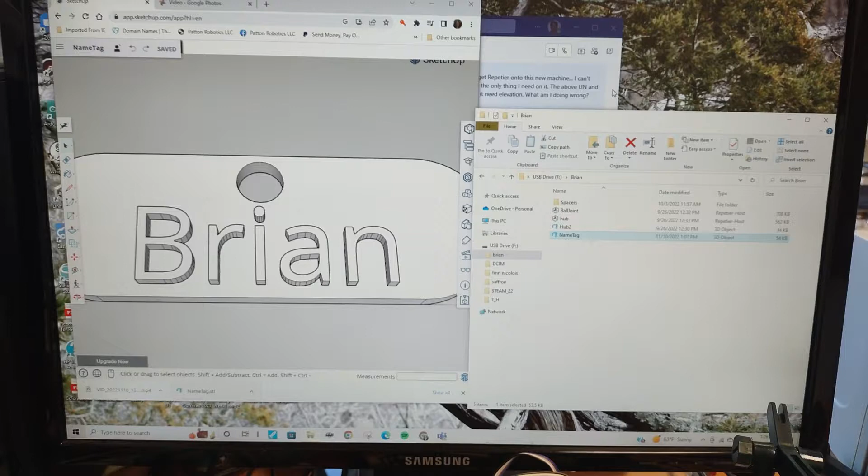Okay, so you've already got your tag, it's all been designed, and then you went ahead and you went down here and you downloaded it as an STL. Mine shows up right down here on a PC. Okay, you can see it's there. And I've dragged it onto my flash drive, which in this case is actually going to be a micro SD card in one of these adapters.

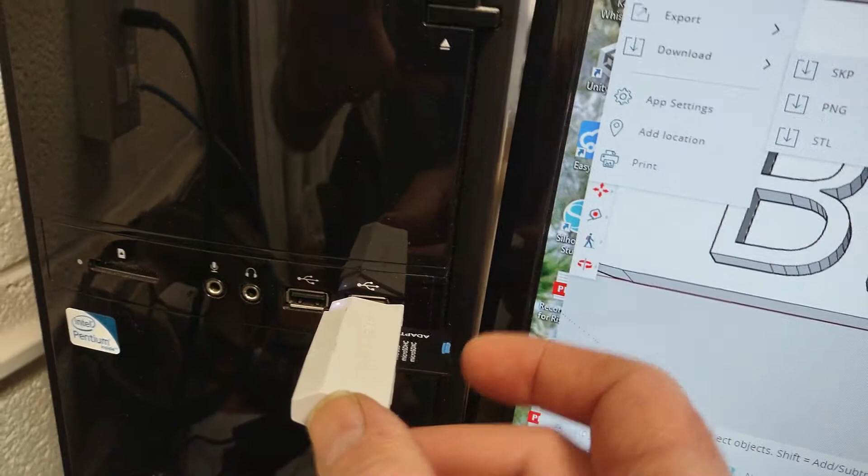So now I'm going to close this, and then I'm going to properly eject it. Okay. Hard to do with the camera here. We're going to eject it. Okay, so it's safe to remove. So now we're going to grab this and we're going to buzz over here to this computer. And you can see I've already played with it, so I've got a placard there.

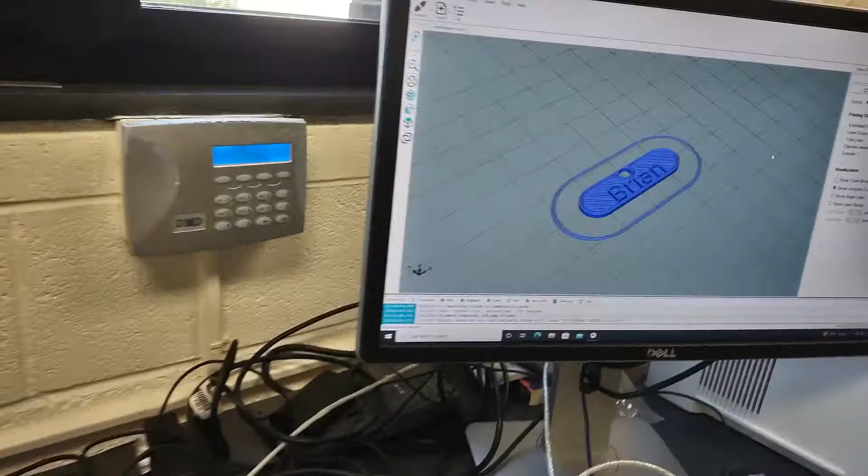But what I'm going to do now is I'm going to go to object placement and I'm going to trash it because I'm going to go through this process again. All right. And I'm going to go ahead and insert this into here. And now what I want to do is I want to come up here. Oops, we can close this. We don't need to deal with it this way. Go up here to load.

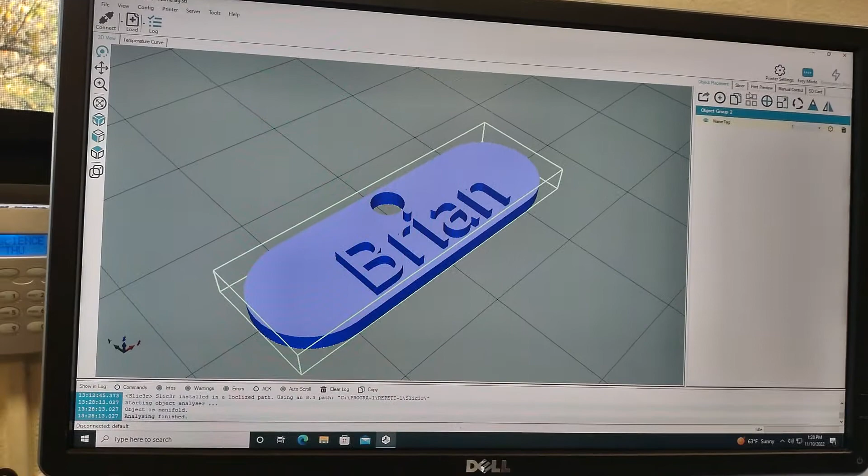And from there, we're going to go find where you put it. Oops. Let me find the drive. There we go. And mine's from Brian. And it's name tag, and we're going to go ahead and open it. Okay, and then from here we come over here to slicer, and probably don't need to check anything, just something simple like this. There's probably not going to be any adjustments, so just slice with Slic3r.

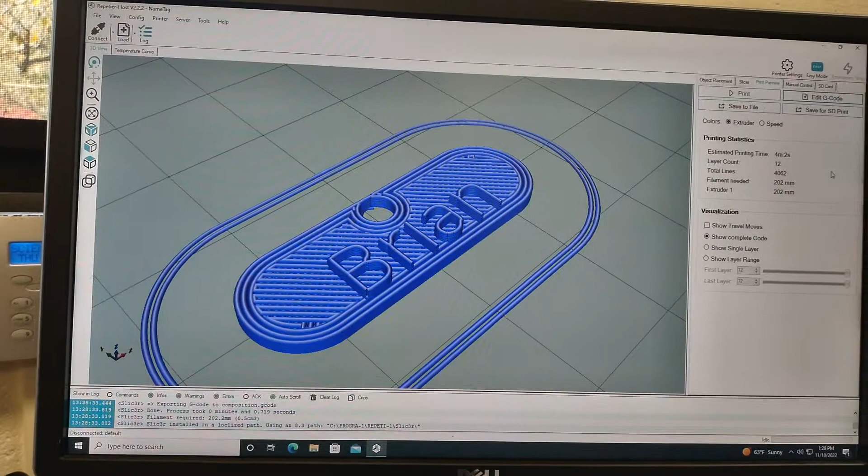And once it's done, you can actually see what's going to happen. These are the individual layers of plastic. If you want to see what it looks like, you can click on Show Single Layer, and then you can kind of click through the layers and see how the plastic's going to be deposited. All right, so let's go back to Show Complete Code.

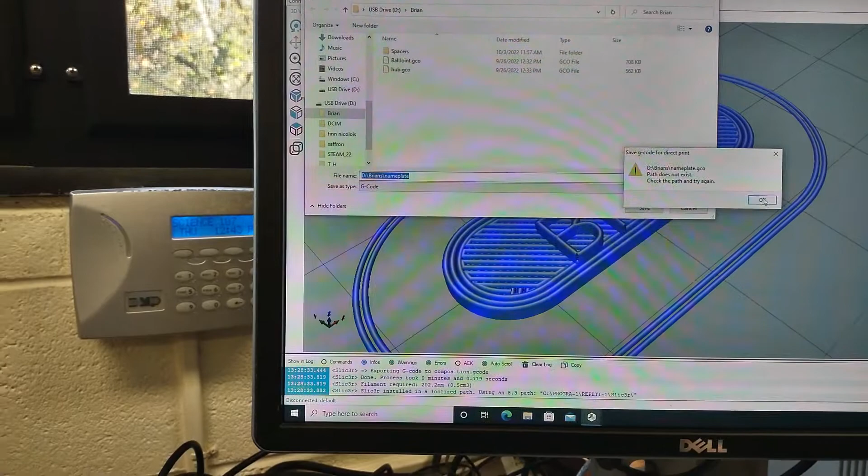And then what I want to do is I want to come up here and I want to save for SD print. So we're going to hit Save. And then we want to make sure that we're in the flash drive. Okay, I'm in a micro SD there, and I'm going to go ahead and put it in my directory, and I'm going to call it nameplate, which I've already named right here. We're going to save it. Oops. All right, hold on, different one. We're going to put it in here, and we're going to call it nameplate.

Okay, and once again we're going to do a safe practice, and we're going to click on this, and we are going to safely remove it. Okay, and then we can pull, notice there's the SD card on the adapter. We're going to pull the whole thing out. We're going to come over here to an available printer. It's already on, and the SD card is right here. Click it, pull it out.

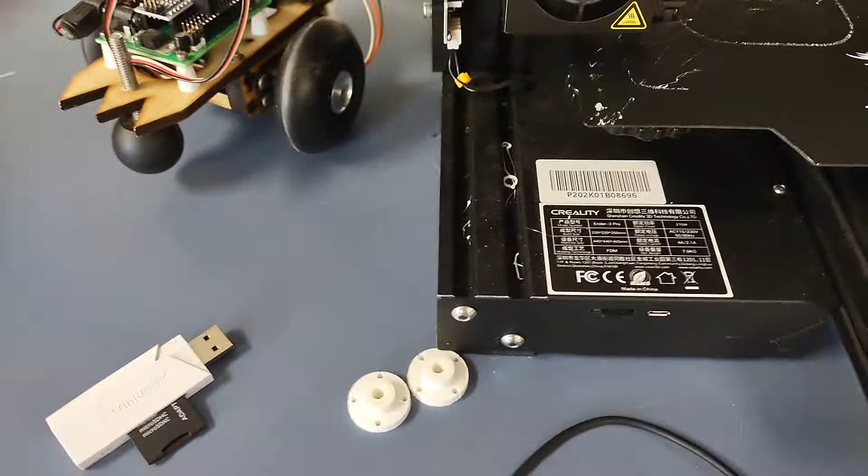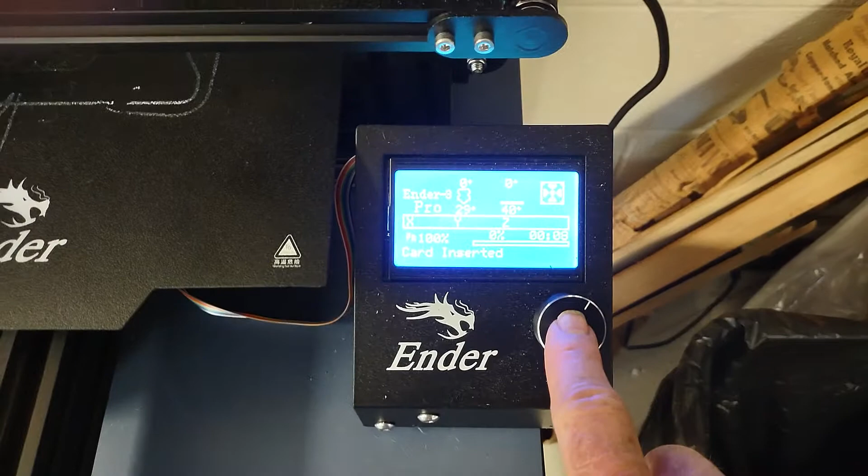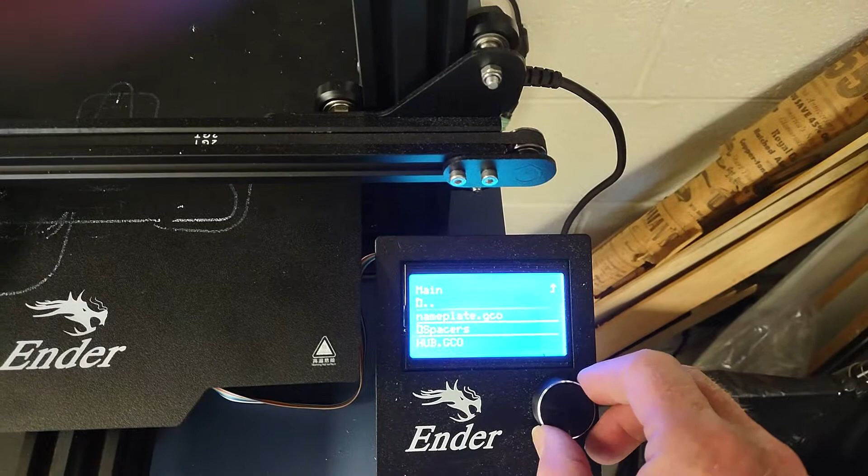Notice the terminals are facing up. I'm going to remove the SD card from my adapter, and it goes into that little slot. Terminal side's up. We're going to make sure that we don't lose this, so I'm going to insert it back into the adapter. Come over here, you push the button, scroll down to print from TF, then find your directory, and then find your file.

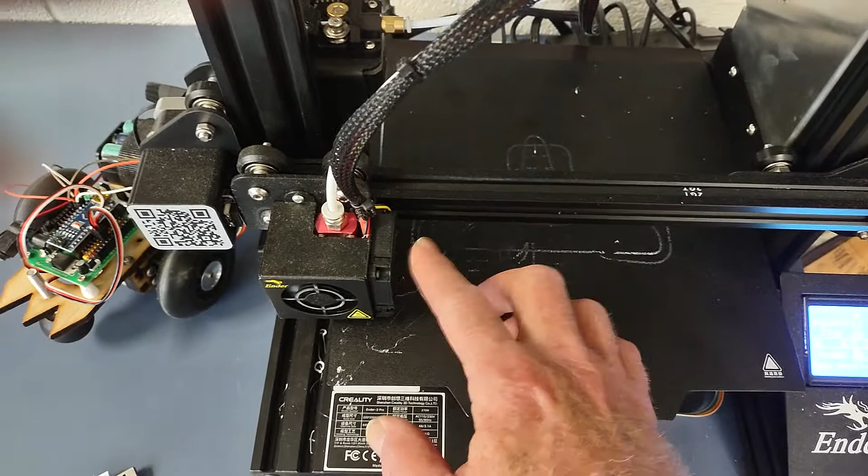Okay, and it's starting to warm up. The bed is heating. Once the bed gets up to 60 degrees, it's going to turn on the heater to the extruder, and it's going to start printing. So make sure that this makes its way back to over here.